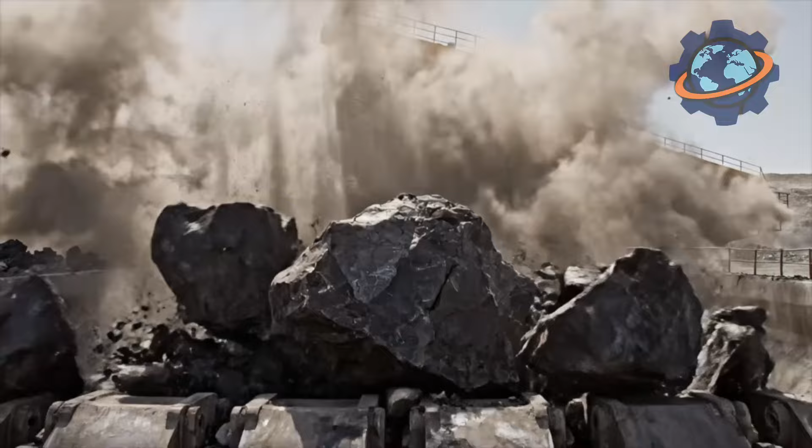Check your smartphone battery. It contains roughly 0.01 ounces of cobalt. Your laptop holds 10 times more. Electric vehicles require 30 pounds per battery pack.

This bluish-gray metal, rarer than platinum, enables rechargeable batteries powering modern civilization. Global demand exceeds 200,000 tons annually, growing 20% yearly. One nation controls 70% of supply: the Democratic Republic of Congo, where cobalt mining represents technological progress built on human suffering.

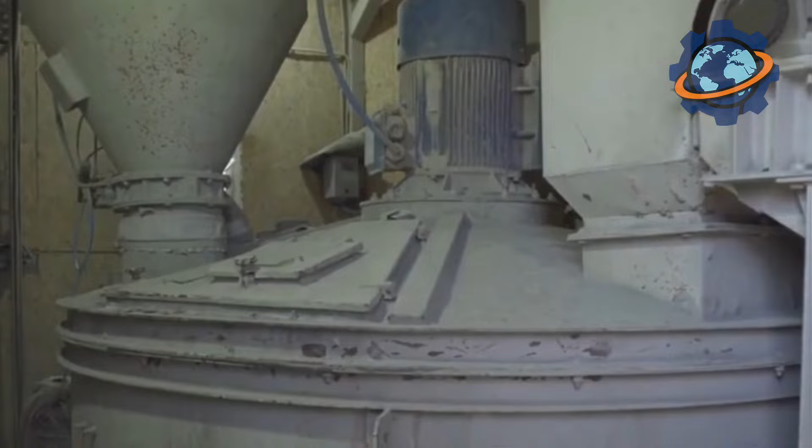How does an obscure metal buried in African soil become indispensable to iPhones and Teslas? Why can't battery manufacturers escape dependency on ethically compromised supply chains? Stay with us. You'll witness industrial-scale extraction reshaping Congo's landscape and discover cobalt's devastating secret.

The green energy revolution runs on metal mined by children.

Kolwezi district in Congo's Katanga province contains the world's richest cobalt deposits, ore bodies stretching 40 miles containing 8 million tons of recoverable cobalt. Glencore's Mutanda mine dominates the landscape: an open pit 2 miles across, descending 1,000 feet. Giant haul trucks, each carrying 400 tons, create spiral roads visible from space. This single operation produces 25,000 tons of cobalt annually, enough for 5 million electric vehicle batteries.

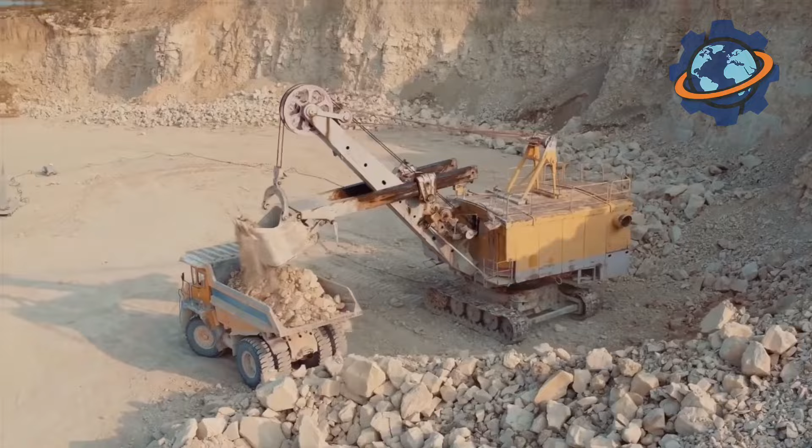But industrial mining tells only half the story. Surrounding the massive pit, tens of thousands of artisanal miners, creuseurs, dig by hand. They tunnel through unstable soil with shovels and pickaxes, extracting ore from shallow pits and abandoned mine shafts, with no safety equipment and no ventilation.

Children as young as 7 work alongside adults, earning $2 daily. The contrast is staggering: billion-dollar machinery operates next to subsistence miners dying for scraps. This is cobalt's duality, cutting-edge technology enabled by Stone Age extraction.

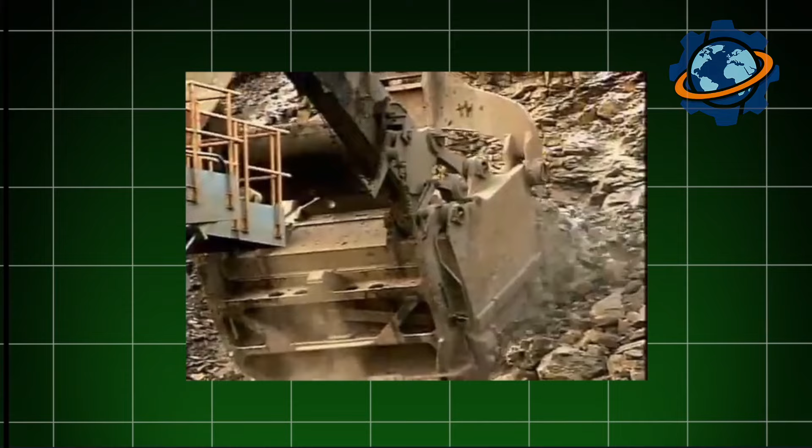The ore, heterogenite and carrollite, contains 3 to 8% cobalt, always mixed with copper. Massive crushers reduce ore to gravel. Ball mills grind further, creating powder fine as flour. The grinding buildings operate continuously, a deafening roar as steel balls pulverize rock. Each ton processed yields 60 pounds of cobalt and 300 pounds of copper. Cobalt is a byproduct, making economics complicated.

Flotation separation begins in enormous tanks containing chemical froth. Copper sulfides attach to bubbles, floating to the surface for collection. Cobalt remains in solution, requiring different chemistry.

The process generates massive waste. For every ton of cobalt extracted, 200 tons of tailings remain. These waste ponds, acidic and toxic, stretch for miles. The environmental damage is permanent: soil contaminated for centuries, groundwater poisoned indefinitely. But demand doesn't care about consequences. Battery manufacturers need cobalt, whatever the cost.

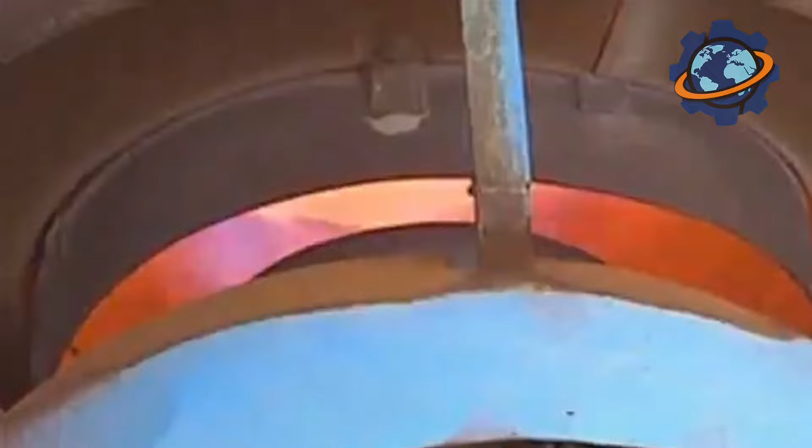Cobalt concentrate undergoes hydrometallurgical processing, chemical extraction replacing traditional smelting. The concentrate dissolves in sulfuric acid at 180 degrees. Copper precipitates first through pH adjustment, then cobalt gets separated from nickel and manganese through solvent extraction, organic chemicals selectively binding cobalt ions. The chemistry is precise, requiring exact pH, temperature, and reagent concentrations.

The result is cobalt sulfate solution, a pink liquid containing 20% cobalt. This solution ships to refineries, mostly in China, where final purification occurs.

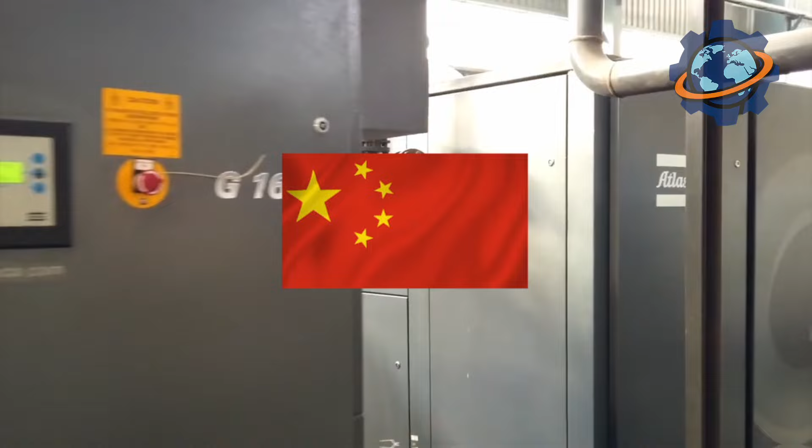Electrolysis deposits pure cobalt metal onto cathodes, sheets of cobalt growing atom by atom from solution. The metal emerges silver pink, hard and brittle. But most cobalt never becomes metal. It stays as cobalt sulfate or cobalt oxide powder, the forms battery manufacturers require. The entire supply chain funnels through Chinese refineries, controlling 80% of global processing capacity.

Battery-grade cobalt demands extreme purity, 99.8% minimum. Impurities like iron, nickel, calcium cause battery degradation. Quality control happens through mass spectrometry, analyzing samples to parts per billion accuracy. Rejected batches get reprocessed. Nothing wastes when material costs $60,000 per ton.

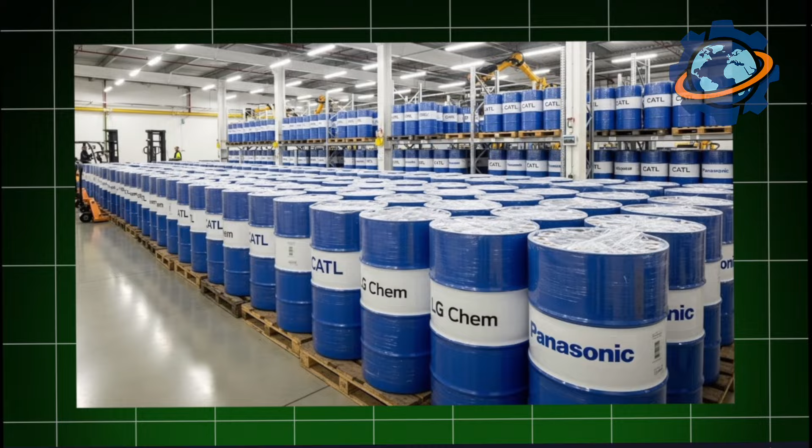The powder gets carefully packaged in sealed drums, each containing 500 pounds. These drums travel to battery manufacturers, LG Chem, CATL, Panasonic, the companies powering Tesla, Apple, Samsung. The cobalt combines with lithium and nickel in precisely calibrated ratios.

Lithium provides energy density, nickel adds capacity, and cobalt delivers stability, preventing thermal runaway, the catastrophic failure causing batteries to explode. Manufacturers desperately seek cobalt-free alternatives, but none work as well. The chemistry is frustratingly specific.

Inside battery factories, cobalt powder mixes with lithium and nickel oxides, creating cathode material. This mixture gets coated onto aluminum foil in layers thinner than human hair. The precision is absolute, coating must be uniform within 2% variation. Any inconsistency creates hotspots during charging, potentially causing fire.

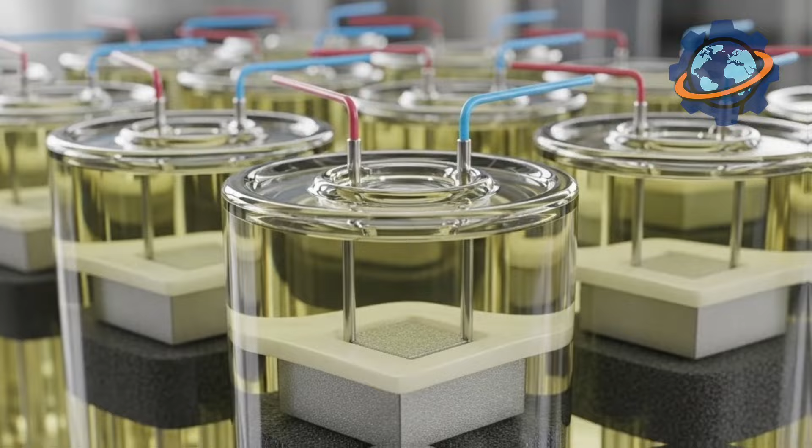The coated foil, along with graphite-coated copper anode and separator membrane, gets wound into cylindrical cells or stacked as prismatic cells. These cells fill with electrolyte, lithium salt dissolved in organic solvents, allowing lithium-ion movement between cathode and anode during charging and discharging. Each cell undergoes formation cycles, controlled charging that activates materials and identifies defects. Failed cells get disassembled, materials recycled. The waste is too valuable to discard.

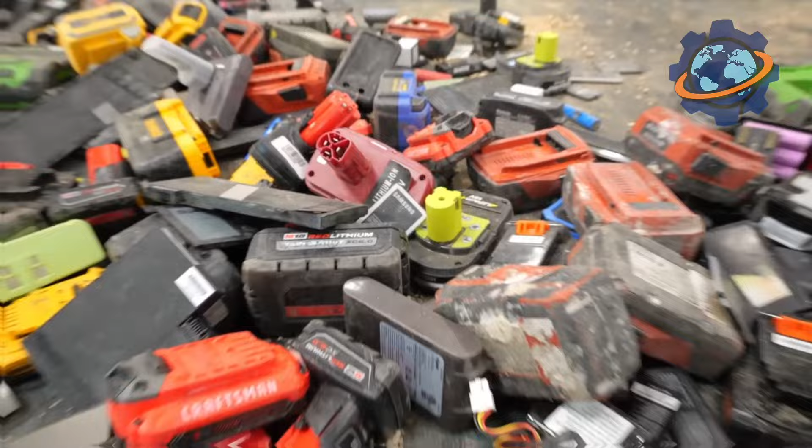Battery recycling could solve cobalt shortage, but currently only 5% gets recycled. The process is challenging. Batteries contain diverse chemistries mixed with plastics and electronics. Shredding risks fires from residual charge, but economic incentive grows. Recycled cobalt costs 40% less than mined material.

Hydrometallurgical recycling dissolves batteries in acid, separating metals through selective precipitation. The recovered cobalt, lithium, and nickel return to battery production with identical performance to virgin materials.

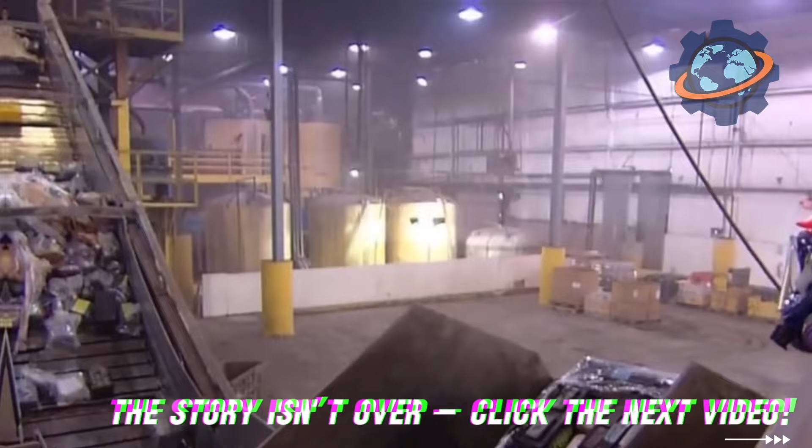The circular economy remains theoretical. Most batteries end up in landfills or incinerated, cobalt lost forever. Companies like Redwood Materials and Li-Cycle are building recycling infrastructure, but scale remains insufficient. By 2030, experts predict recycled cobalt could supply 30% of demand. Until then, Congo's mines run continuously, extraction accelerating despite consequences.

Cobalt derives its name from the German Kobold, meaning goblin, because medieval miners blamed goblins when cobalt ore poisoned them during silver extraction. For centuries, cobalt's only value was as blue pigment in pottery and glass.

Everything changed when John Goodenough invented the lithium-ion battery in 1980. His cobalt oxide cathode enabled rechargeable batteries light enough for portable electronics. Sony commercialized the technology in 1991, launching the mobile revolution.

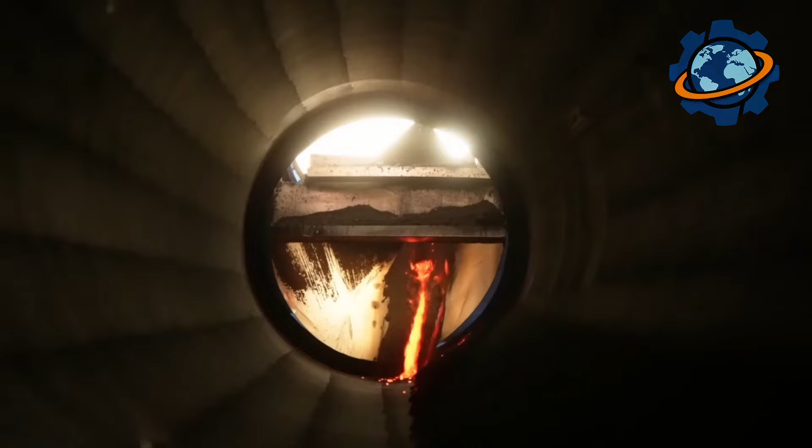Initially, cobalt demand remained modest. Cameras, laptops, and phones used small batteries. Then electric vehicles emerged. A single Tesla Model S contains 24 pounds of cobalt, equivalent to 1,000 smartphones. As EV adoption accelerates, cobalt consumption grows exponentially. By 2030, transportation will consume 60% of global cobalt supply.

The metal that poisoned medieval miners now powers humanity's energy transition. Irony lost on nobody. Carbon emissions perspective shows a paradox. Electric vehicles reduce emissions 80% versus gasoline cars over their life cycle, but mining cobalt generates massive environmental damage plus humanitarian crisis.

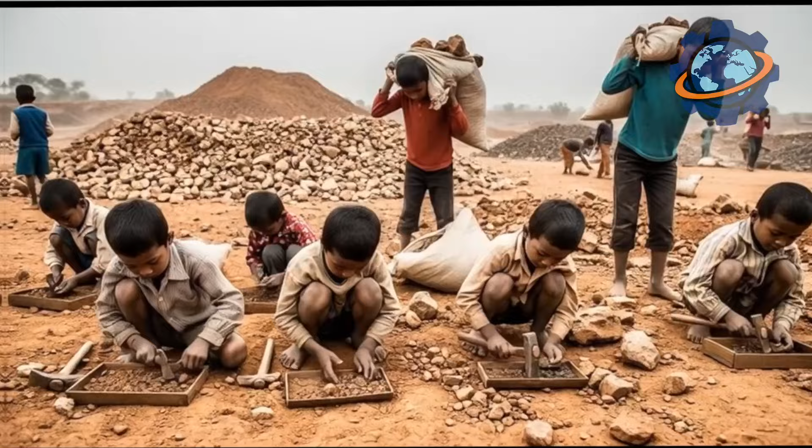Children in Congo work illegal mines, exposed to dust causing respiratory disease, digging tunnels that collapse regularly, earning subsistence wages while battery companies generate billions. Amnesty International documented children as young as 7 mining cobalt sold to major tech companies. The supply chain is deliberately opaque, ore changes hands multiple times before reaching refineries, obscuring its origins.

Here's the secret we promised: the green energy revolution cannot exist without ethically compromised cobalt. Every Tesla, every iPhone, and every laptop depends on metal extracted under conditions violating international labor laws. Battery manufacturers know this. They issue statements promising ethical sourcing while buying through intermediaries, providing plausible deniability.

The truth is uncomfortable. Transitioning away from fossil fuels requires accepting different moral compromises. We've replaced oil fields with cobalt mines, exchanging one exploitation for another. From Congo's pits to Silicon Valley's gadgets, the transformation completes. We've created technology liberating us from combustion engines while enslaving miners and supply chains we refuse to acknowledge.

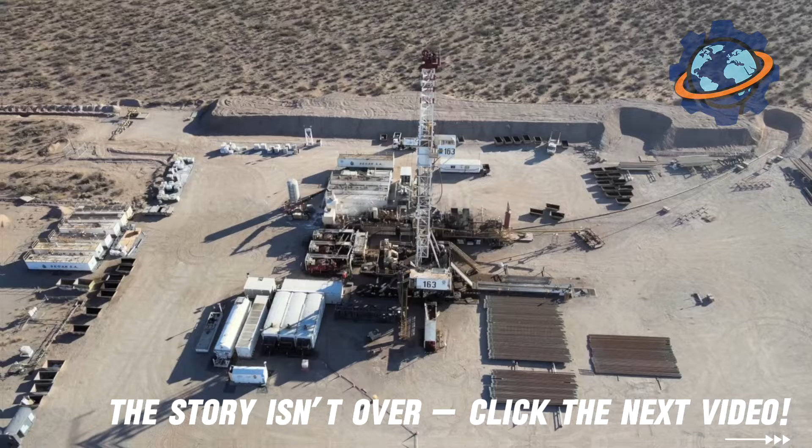That electric vehicle representing environmental consciousness contains metal mined by children. The battery in your pocket enabling instant global communication required someone else's suffering to exist. Progress always demands sacrifice. We've just decided others should make it. Cobalt doesn't just power devices, it exposes civilization's willingness to ignore atrocity for convenience. We know the cost. We pay it anyway.

Every year, billions of people around the world press the same pedal, and they don't even realize it was slowly killing them for decades. What was supposed to save lives quietly filled the air with poison. Why did a material once considered perfect vanish almost overnight? And what replaced it? There's one detail brake pad ads never mention, but it's what determines whether your car stops in that critical split second.

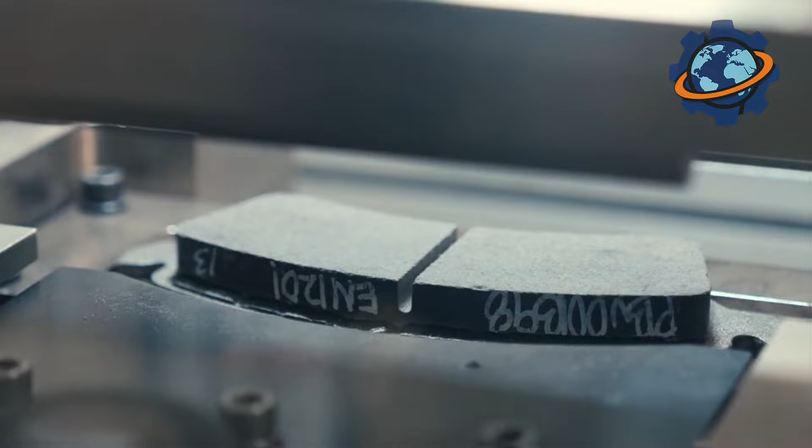Today, these pads withstand hell itself, don't smoke, and leave barely a trace. But the road here was deadly dangerous. Stick around till the end, and you'll discover which hidden component once cost millions of lives and why modern factories guard their formulas like state secrets.

In the 1920s, every brake pad contained asbestos, fibers that could handle 1500 degrees Fahrenheit and wouldn't wear out. But every tap of the pedal released microns of poison into the air, settling in the lungs of drivers and pedestrians. By the 1990s, asbestos had killed millions through lung cancer and mesothelioma. Europe banned it first in 1998.

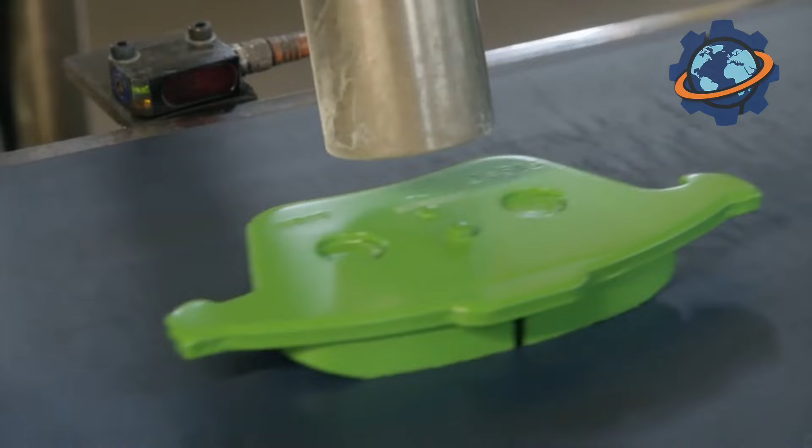Today, the top choice is ceramic composites. The base is ceramic made from silicon nitride and silicon carbide, mixed with copper fibers for heat dissipation. The material withstands 650 degrees without deforming, doesn't squeal, and doesn't dust. Ceramic makes up 40 or 50% of the mass, reinforced with steel fibers for strength.

At 500 degrees, regular pads smoke. Ceramic ones stay cool as ice. In this massive plant, something is born that'll save your life on the road.

Manufacturing ceramic brake pads isn't just mixing powder with binder. It's precise science involving pressure, fire, and high-precision machinery. Each pad, weighing 7 ounces, has to survive 600 degrees of hell, not crumble, and not let go of the rotor. Let's break down the process step by step, from raw materials to finished kit.

Everything starts with hoppers full of powders. The main ingredient, ceramic, meaning silicon nitride and silicon carbide, a white powder hard as diamond.

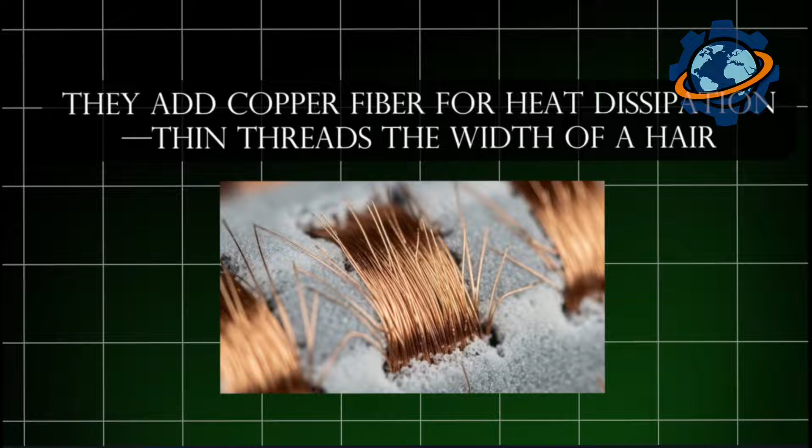They add copper fiber for heat dissipation, thin threads the width of a hair, graphite for smooth grip, reinforced glass for strength, barium sulfate for stability at high temperatures. Each recipe is a factory secret, like the Coca-Cola formula.

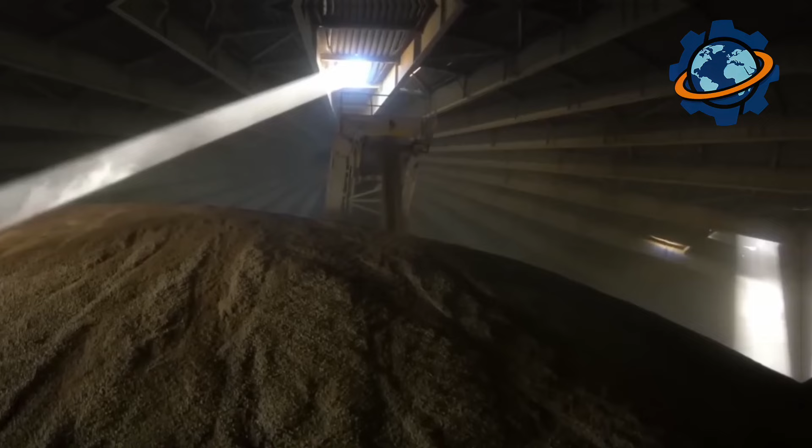In giant mixers with a 500-gallon capacity, powders are combined in precise proportions. They add liquid wax-based lubricant, 5 or 7% by weight. The mixer spins for 30 minutes at 50 revolutions per minute, transforming dry powder into a uniform wet mass, like bread dough. Temperature is held at 100 degrees so the lubricant doesn't freeze.

The result is raw dough weighing 1,100 pounds, ready for forming. The mass goes into a rotary press, a machine with 20 tons of force. They pour 550 grains of the mixture into a metal mold measuring 6 by 2.5 by half an inch. The top plate descends with 285,000 pounds per square foot of pressure, like parking a tank on your palm.

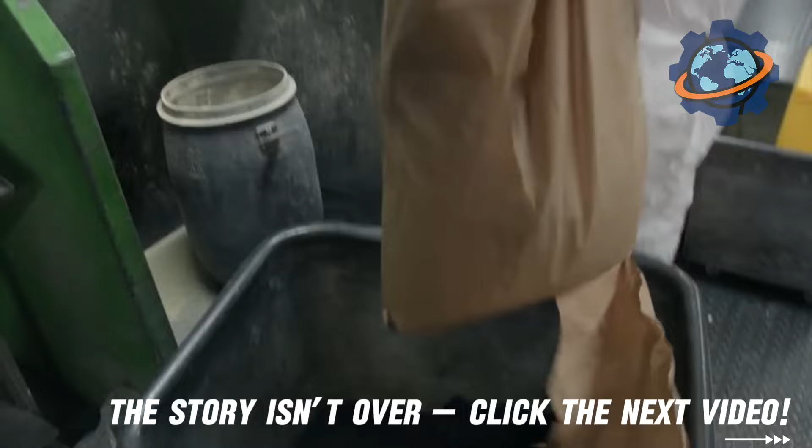In 10 seconds, the dough compresses into a monolithic green blank, 3/4 of an inch thick. The pressure squeezes out all the air, creating a density of 175 pounds per cubic foot. The press runs in cycles, 60 blanks per hour. Each comes out perfectly smooth with a friction surface angled at 5 degrees for better disc contact. The blank's still brittle as cheese, but it already has the shape of the future pad.

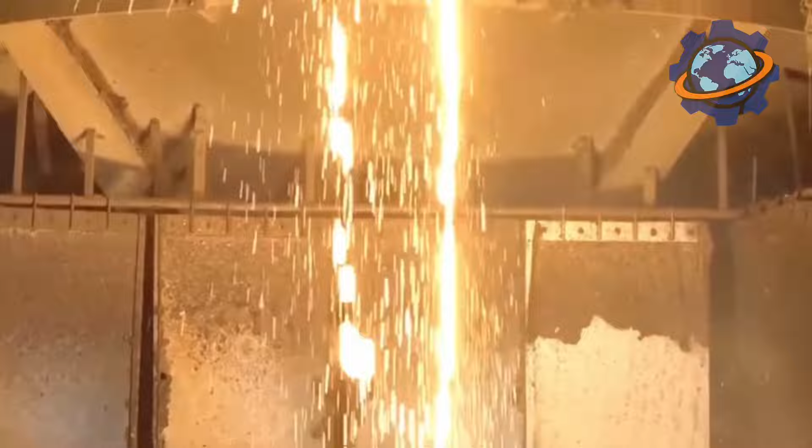The most critical stage? Sintering. Green blanks go onto steel trays, 50 pieces each, then get pushed into a tunnel kiln 100 feet long. Temperature rises gradually. At peak heating, 4 hours in, the ceramic melts. Copper fibers fuse. Graphite crystallizes. Total sintering time, 12 hours.

Finished pads, gray-silver monoliths, go to inspection. A laser scanner checks dimensions accurate to 1/100th of a millimeter. Ultrasound checks density and cracks. 2% get rejected. Next, grinding.

The machine removes 1/2 millimeter from the friction surface for perfect geometry. Edges get rounded to prevent squealing. They apply a protective coating, a thin layer of molybdenum disulfide for that first soft braking. Laser marked, then assembled into kits, 4 pads plus springs plus backing plate.

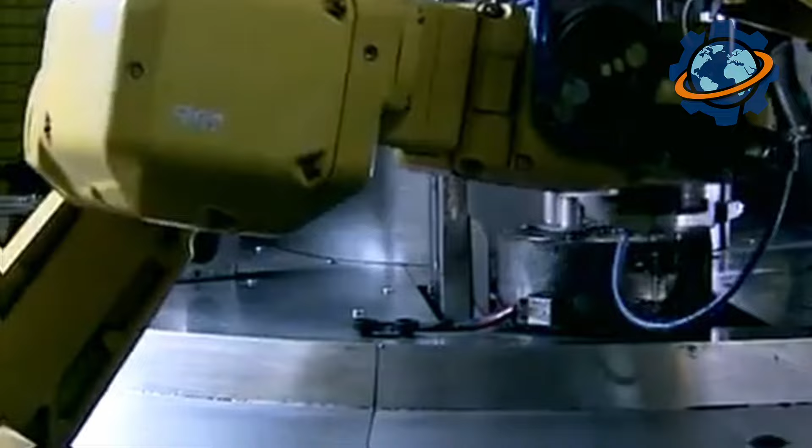The final test, the simulation stand. The pad is pressed against a disc spinning 2,000 revolutions per minute for 200 cycles. Acceleration, then hard braking up to 600 degrees. They check wear, squealing, dust.

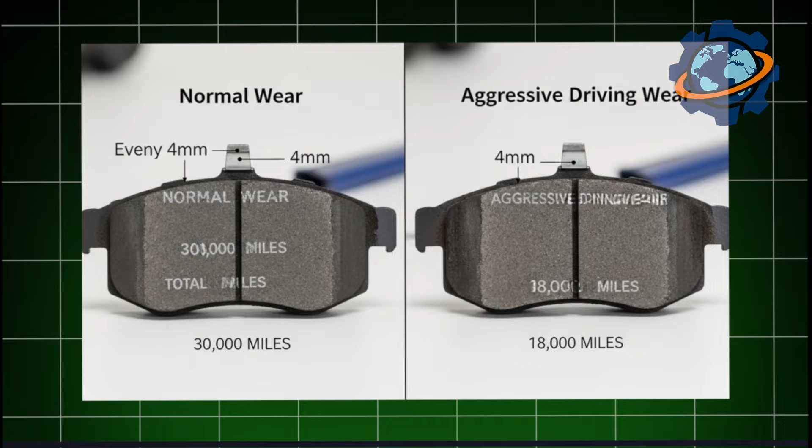Ceramic pads pass without smoke. Metal ones squeal. A finished pad wears out after 30,000 miles. That's normal wear. With aggressive driving, it wears out after 18,000 miles. The U.S. market operates with 131 facilities, which has decreased by 0.6% in recent years due to automation.

Production is tied to the automotive industry. Rising car sales drive demand, especially for pad replacements in trucks and passenger vehicles. Key trends: shifting to eco-friendly materials without copper.

California capped it at 0.5% starting in 2025, which cut pollution by 28% statewide. Imports matter, but tariffs affect local production. The leaders are the southern U.S., specifically Texas, Alabama, Tennessee, with Ford and GM plants.

The European brake pad market shows steady growth at an average annual rate of 4.7% through 2028. In Germany, the market leader, volume will hit nearly $320 million by 2028. France is growing at 5.5% annually, the UK at 3.8%. Metallic pads are still popular and hold 25% of the EU market because they're cheap for trucks and Porsches.

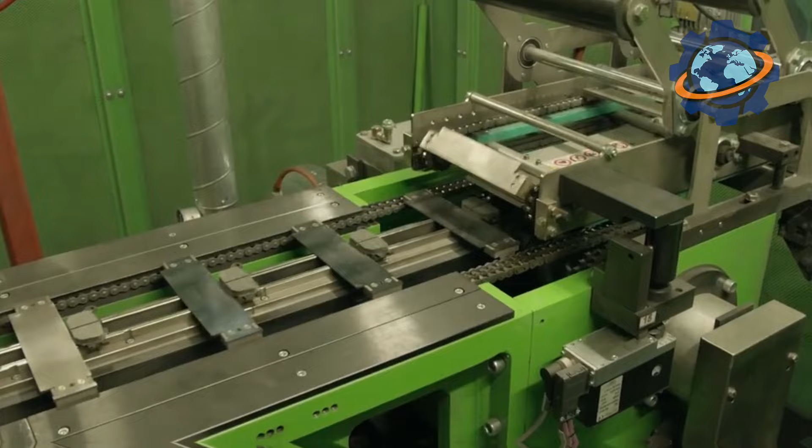But their dust is a problem. Steel and copper settle on roads, get into water and lungs. Ceramic cuts emissions by 80% compared to these semi-metallics.

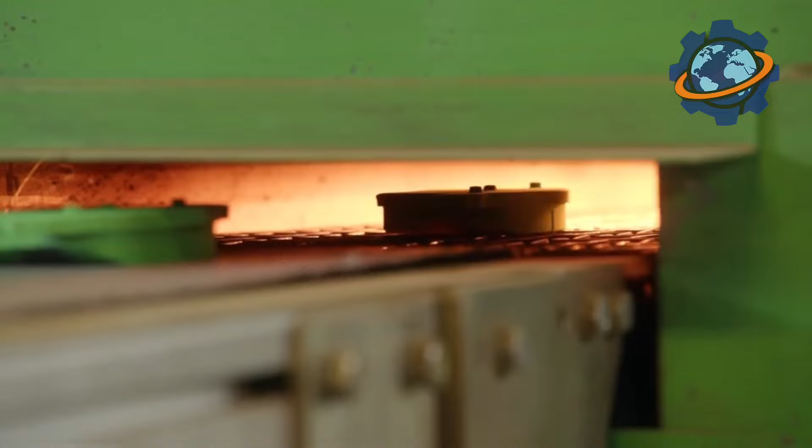Besides asbestos and metallic pads, there was an attempt to make organic ones. These are pads from the 2000s, the first mass replacement for asbestos. The base is synthetic rubber, fiberglass for reinforcement, Kevlar or aramid fibers for strength, plus barium sulfate and graphite.

The soft compound gave a quiet bite. Little dust, didn't scratch rotors. But at 550 degrees, they lose 30% of their stopping power, which works for daily driving but not for sport.

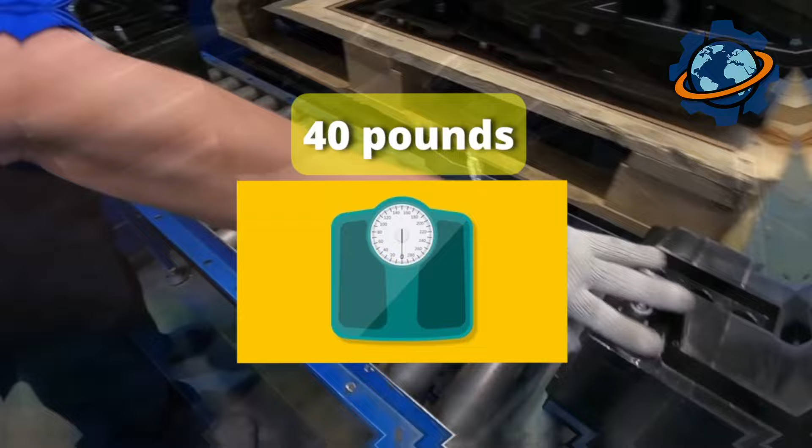Hold a car battery. It weighs 40 pounds. 30 of that is pure lead. Every year, humanity produces 11 million tons of this heavy, soft metal.

Romans used it for plumbing 2,000 years ago. We banned it from paint and gasoline because it poisons children's brains. Yet we can't quit it. Lead stops X-rays dead, stores electrical energy better than any alternative, and possesses one superpower no other metal can match.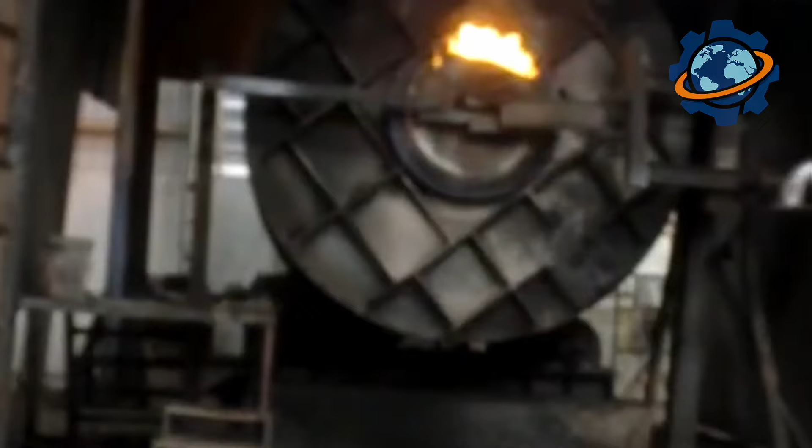How does rock containing lead sulfide become the shields protecting radiologists? Why do we mine fresh ore when mountains of old batteries exist? Stay with us. You'll discover why lead is simultaneously essential and deadly, and the shocking secret making it the most recycled material on Earth. 99% returns to use forever.

Our story begins in Missouri's Lead Belt, America's primary source. Unlike flashy gold mines, lead operations look industrial, almost boring. Massive drills bore 800 feet down, following veins of galena, lead sulfide ore appearing as metallic gray crystals.

Each ton of ore contains just 3% lead. The rest is worthless rock requiring removal. Underground, miners work in perpetual darkness, drilling blast holes into rock faces.

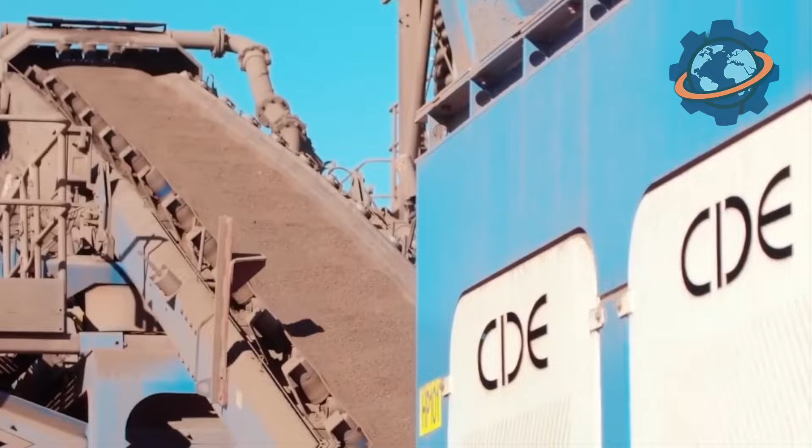The lead content makes galena unusually dense. Lift a basketball-sized chunk and it weighs like a bowling ball. You feel lead before you see it, explains one miner. Galena has this heft that surprises you every time.

Explosives fracture the ore. Loaders scoop rubble into trucks, climbing back to surface through spiral tunnels taking 20 minutes to traverse. Topside, the crushing begins. House-sized jaw crushers reduce boulders to gravel, while workers monitor from control rooms behind thick glass.

Lead dust is insidious, invisible particles that accumulate in bones, causing damage that appears years later. Modern facilities employ enclosed systems, but older operations tell different stories.

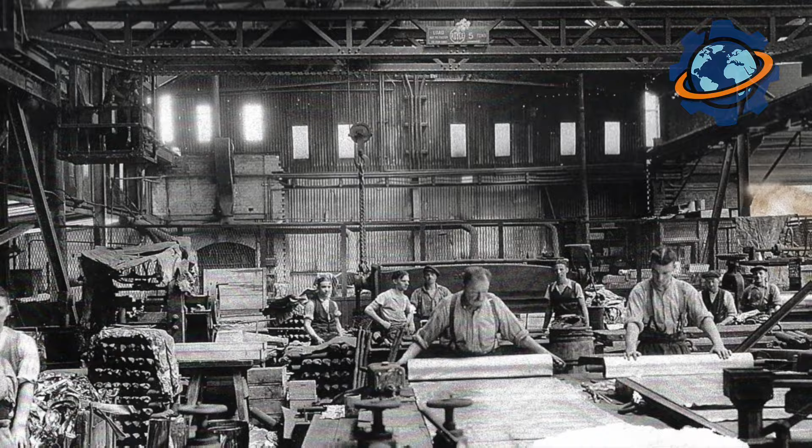Walk through a 1970s lead smelter photograph. Workers in street clothes, no respirators, covered in gray dust. Many develop neurological problems by age 50. The industry learned hard lessons about lead toxicity.

Today, air monitoring systems track particle counts continuously. Workers shower before leaving, and clothes stay on site. Blood tests happen monthly. One manager puts it bluntly: respect lead or it destroys you.

There's no middle ground. The ore enters roasting furnaces heated to 1,400 degrees. Here, sulfur burns away as sulfur dioxide, captured and sold to sulfuric acid manufacturers. What remains is lead oxide, a yellow powder looking harmless but deadly if inhaled.

The roasting building operates under negative pressure. Air flows inward, never outward, preventing escape of lead-contaminated atmosphere.

Watch the roasting process through observation windows. Yellow flames dance over tumbling ore. Operators adjust oxygen flow constantly. Too much air, lead oxidizes excessively. Too little, sulfur remains. Getting it wrong costs millions in lost efficiency.

The roasted material, called calcine, moves to smelting via enclosed conveyor belts. Nothing touches open air. The paranoia about containment isn't regulation theater, it's survival. Lead contamination cleanup can bankrupt companies.

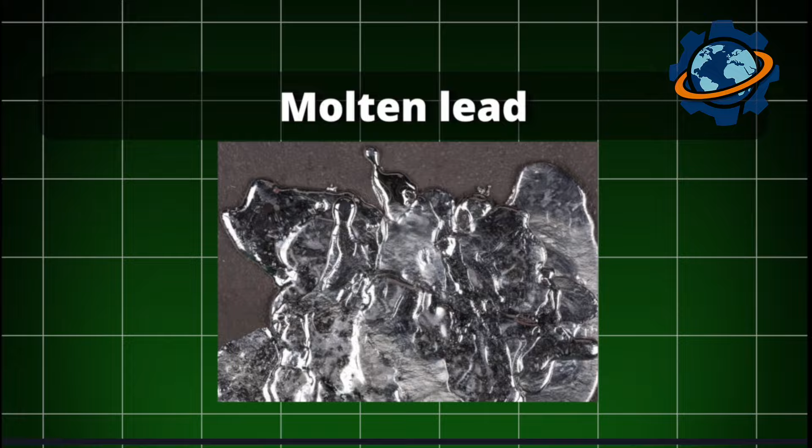Ancient Romans made lead pipes by pouring molten metal into sand molds. The same basic process works today because lead's properties haven't changed in millennia.

The final product achieves 99.99% purity. This refined lead feeds manufacturing plants producing batteries, radiation shielding, and specialized applications.

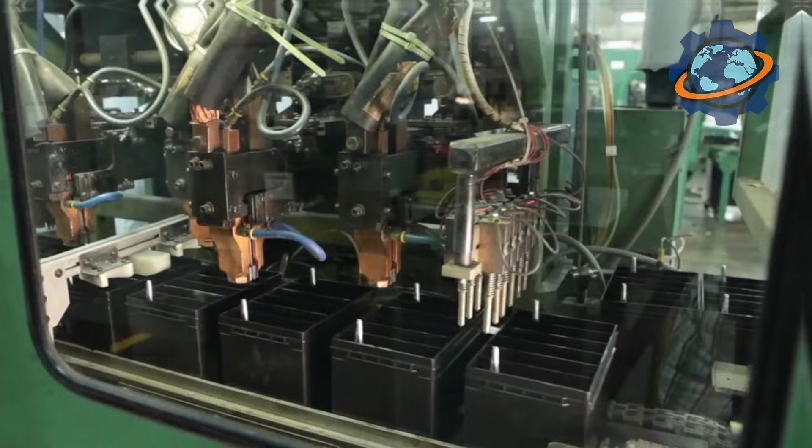But here's where the story shifts. Increasingly, smelters don't process mined ore, they process old batteries. Secondary smelters, as they're called, have grown to dominate the industry. Why mine lead when every dead car battery contains 20 pounds ready for reuse?

The economics are brutal. Recycled lead costs 40% less than mined lead. Primary smelters struggle competing. Many shut down, unable to match prices of operations running on discarded batteries.

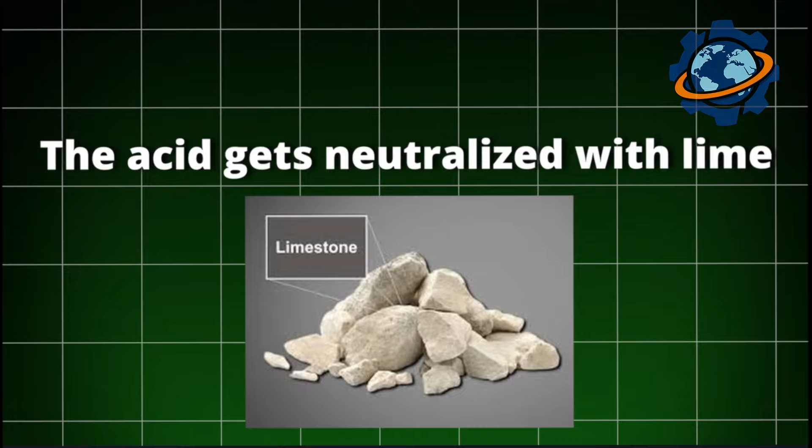Battery recycling begins at collection centers, where mechanics and scrappers deliver exhausted batteries by the thousands. Workers drain sulfuric acid into neutralization tanks. Each battery contains about 2 gallons of corrosive liquid that can't enter the recycling stream. The acid gets neutralized with lime, creating calcium sulfate, sold as a drywall ingredient.

Nothing wastes. Drained batteries move to breakers, rotating drums with internal hammers that shatter cases, separating lead plates from plastic housings. It's violent. The noise resembles continuous demolition.

Lead plates sink in water, plastic floats. Simple physics achieves separation. The plastic gets washed, shredded, and sold to manufacturers making new battery cases. The lead plates, still coated with lead oxide from battery chemistry, head to furnaces for smelting.

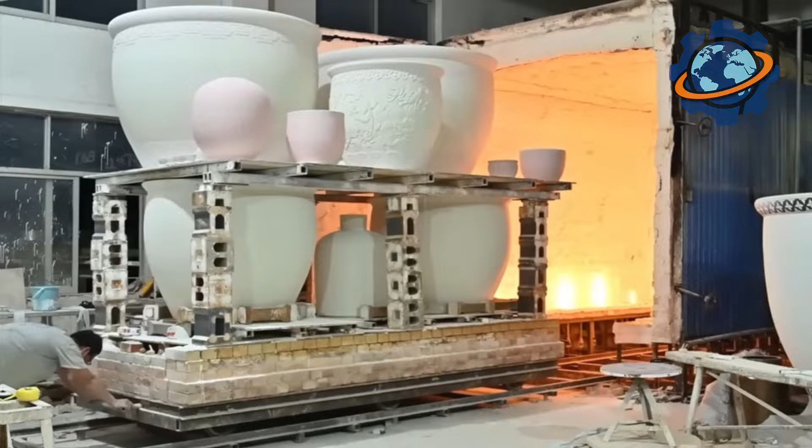One facility processes 50,000 batteries daily, enough lead to manufacture 12,000 new batteries. The smelting of recycled lead mirrors primary smelting, but operates at smaller scale with tighter controls.

Furnaces melt battery plates at 1,000 degrees. Impurities rise as slag, skimmed continuously. The molten lead flows into casting machines, producing standardized ingots shipped to battery manufacturers.

Here's the remarkable part. A battery recycled today will be back in a new battery within 30 days. The loop is that tight. And that battery will get recycled again in 3 years when it fails, and again and again.

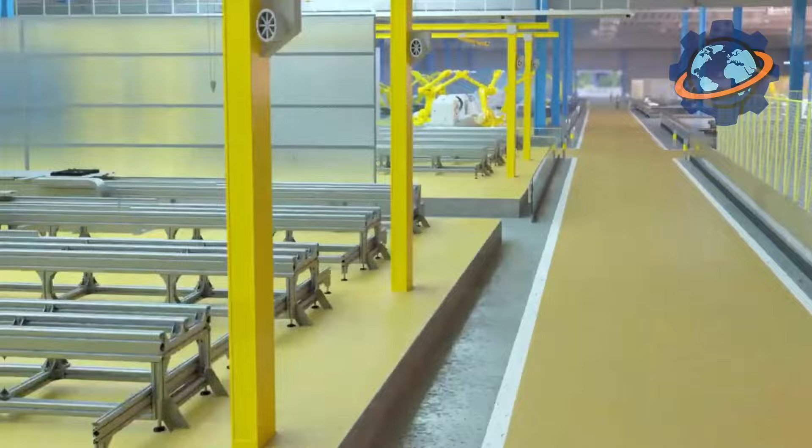Lead never wears out. Its atomic structure remains unchanged, regardless of how many times it melts and resolidifies. The lead in your current car battery might have started life in Roman plumbing, been refined into medieval type, reformed into ammunition, and now cycles through automotive batteries. Lead is functionally immortal. Lead's history intertwines with civilization's darkest chapters.

Romans sweetened wine with lead acetate, called sugar of lead, not knowing it caused madness in emperors. Medieval alchemists poisoned themselves studying it. The gasoline industry added tetraethyl lead as an anti-knock compound in 1921, despite knowing its neurotoxicity.

For 50 years, automobile exhaust sprayed lead over every city, poisoning children and causing measurable drops in IQ. The phase-out began in the 1970s as evidence became undeniable. Removing lead from gasoline represents public health's greatest victory. Childhood blood lead levels dropped 90%.

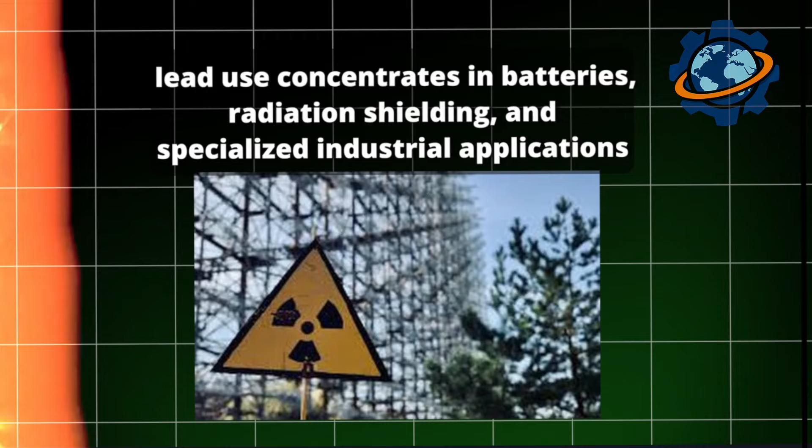Paint bans followed. Today, lead use concentrates in batteries, radiation shielding, and specialized industrial applications. We've learned to respect lead's toxicity while exploiting its unique properties. The metal that once poisoned Rome now powers modern transportation, but safely, contained, recycled endlessly.

Carbon emissions dropped 72% producing recycled lead versus mining virgin ore. Industry saves $63 billion annually through battery recycling. Processing scrap uses 65% less energy than conventional smelting.

Here's the secret we promised. Lead achieves 99% recycling rates, the highest of any industrial material.

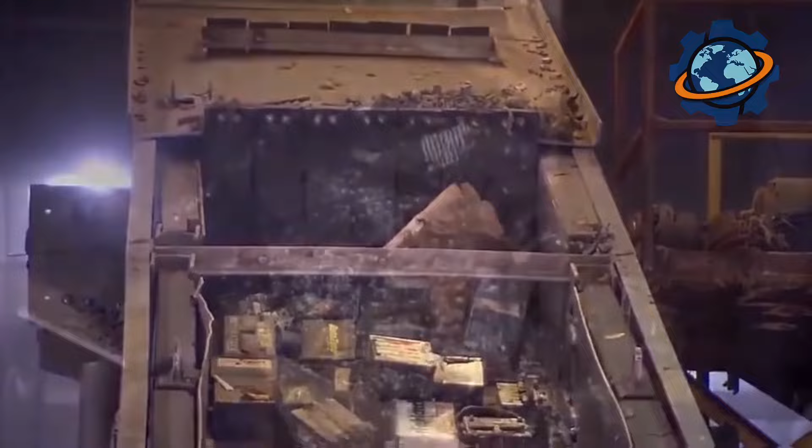That car battery has a 99% chance of being recycled properly because it's worth money. Scrappers pay you for dead batteries. Mechanics collect them religiously. The economic incentive creates a closed loop more efficient than any regulation could mandate.

From ancient Rome to modern recycling, the transformation completes. We've learned that some materials are too valuable to discard, too dangerous to mishandle, and too useful to abandon. Lead will never be green, but it might be the perfect example of circular economy functioning through market forces. That heavy metal under your hood has been serving humanity for millennia. It'll still be serving our descendants centuries from now, because lead never truly dies. It just waits to be reborn.

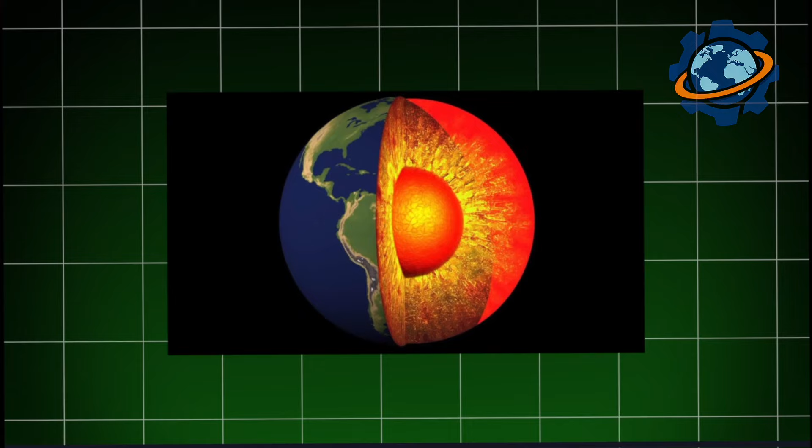Every second, humanity produces 60 tons of steel, 2 billion tons per year. That's more than all other metals combined. 95% of all metal used by civilization is iron and steel. Without iron, there'd be no skyscrapers, bridges, ships, cars, or trains.

The Lebedinsky Quarry in Russia is one of the planet's largest iron ore quarries. Depth, nearly 2,000 feet. Width, 3 miles. From the edge, you can't see the bottom. A gigantic wound in the earth from which 100,000 tons of iron ore are extracted daily.

Excavators as tall as 10-story buildings scoop rock with buckets holding 1,800 cubic feet. One bucket is like a small house. Dump trucks with 360-ton capacity haul ore up the spiral road. Wheels taller than a person.

But before loading the ore, it needs to be blasted. Drilling rigs create holes 65 feet deep. Tons of ammonium nitrate explosive are packed into these holes. The explosion? Earth trembles. A wall of rock tall as a skyscraper crashes down. A dust cloud rises 3,000 feet.

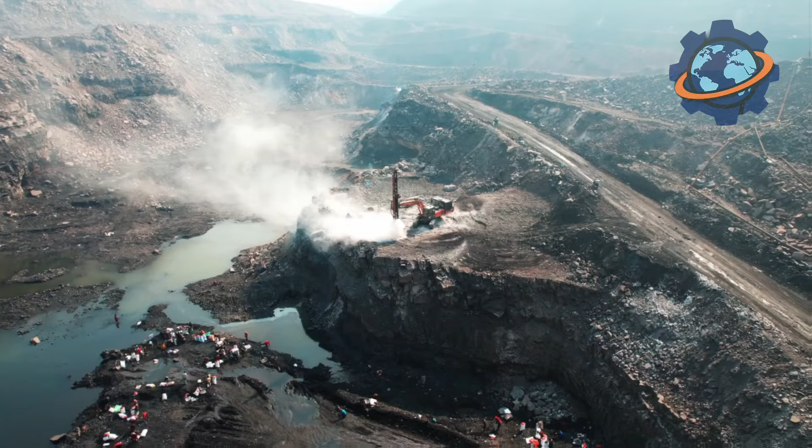After the dust settles, excavators begin work. The ore is reddish-brown, sometimes almost black. Magnetite and hematite, iron oxides. Iron content ranges from 30 to 60%. The rest is waste rock.

The ore goes to a processing plant. Massive cone crushers grind bus-sized chunks. The noise can be heard for miles. Ore gets crushed to fist size, then to gravel, then smaller.

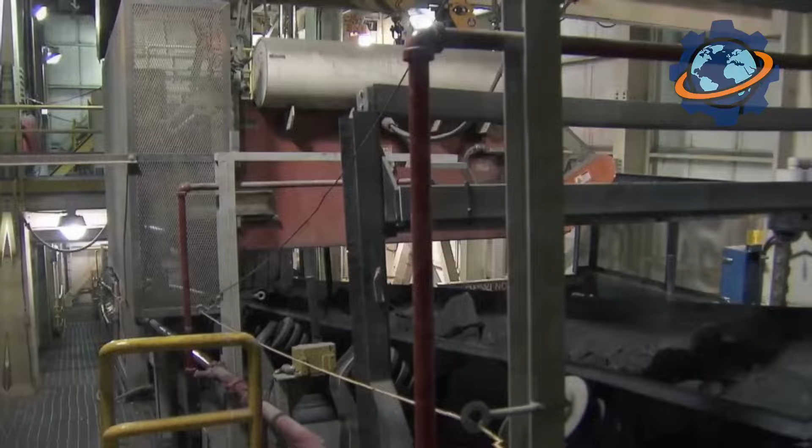It enters ball mills, steel drums 20 feet in diameter, 33 feet long. Inside are hundreds of tons of steel balls. The drum rotates, balls drop, grinding ore into fine powder. After 8 hours of grinding, you get reddish-brown dust. It's mixed with water, creating pulp, liquid slurry.

This slurry passes through magnetic separators. Magnetite sticks to magnetic drums. Waste rock washes away. The concentrate contains 65 to 70% iron. From this, they make pellets, granules the size of walnuts. Wet concentrate gets rolled into balls on special drums, then fired at 2,400 degrees Fahrenheit. Pellets harden, becoming rock solid.

These pellets are raw material for blast furnaces. Each plant produces millions of tons of pellets yearly. They're loaded onto trains and shipped to steel mills.

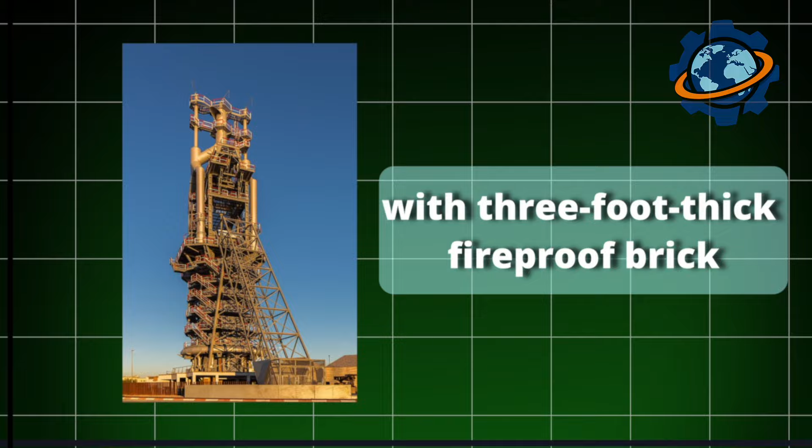A blast furnace is a steel tower 330 feet tall, 46 feet in diameter, 30 stories of pure metal and fire. Lined inside with 3-foot-thick fireproof brick. Internal volume, 176,000 cubic feet. Iron ore pellets, coke, and fluxes like limestone or dolomite are loaded from the top, in layers, like a layered cake. Several hundred tons at a time.

From below, through tuyères, openings in the walls, hot air is blown in. Air temperature, 2,200 degrees Fahrenheit. Pressure, 4 atmospheres. Coke ignites. Temperature in the furnace's lower section reaches 3,600 degrees Fahrenheit. Pellets slowly descend, heating up. Different reactions occur at different heights.

First, moisture leaves the ore. Then, at 930 degrees, iron oxide reduction begins. Carbon from coke strips away oxygen. At 1,800 degrees, ore becomes spongy iron. At 2,700 degrees, iron melts. Drops of molten metal flow down.

At the furnace bottom, molten pig iron accumulates, an iron alloy with 4% carbon. Pig iron temperature at the furnace bottom is 2,700 degrees Fahrenheit. It glows blindingly white with an orange tint.

Pig iron is denser than slag, so it stays at the bottom. Slag, molten impurities and fluxes, floats on top. Every 4 hours, they open the tap hole, an opening in the furnace's sidewall.

Pig iron tapping is a fire show. A stream of molten metal flows down channels. Sparks fly dozens of feet. The brightness requires dark glasses to watch.

Pig iron flows into massive ladles on railroad cars. One ladle holds 300 tons. It's a locomotive made of molten metal. The ladle gets covered to prevent cooling and shipped to the steelmaking shop.

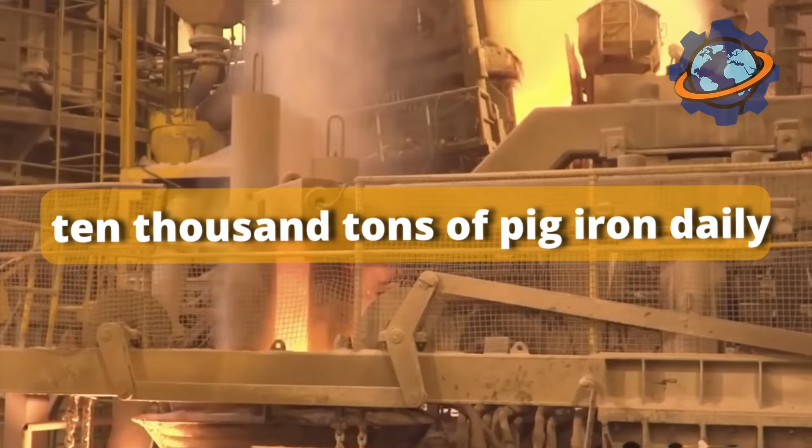One blast furnace operates continuously for years. Stopping is catastrophic - metal would solidify inside. The furnace produces 10,000 tons of pig iron daily, that's like 100 railroad cars. Major steel mills have 10 to 15 blast furnaces.

But pig iron isn't steel yet. It's brittle due to high carbon content. Steel is needed, an alloy with less than 2% carbon.

Pig iron gets poured into a converter, a massive pear-shaped vessel 33 feet tall, lined with fireproof brick. It holds 350 tons of molten metal. The converter tilts, pig iron pours in, steel scrap is added for cooling.

The converter returns to vertical position. An oxygen lance, a tube 20 inches in diameter, lowers from above. Oxygen flow begins - a jet of pure oxygen at 150 pounds per square inch pressure strikes the molten metal.

A violent reaction begins. Oxygen oxidizes carbon, silicon, manganese, the impurities in pig iron. These exothermic reactions release enormous heat. Temperature rockets to 3,200 degrees Fahrenheit.

Metal boils and churns. Flame tongues several feet high shoot from the converter mouth. Sparks and molten drops fly everywhere. The blowing process takes 20 minutes.

In this time, 350 tons of pig iron become steel. Carbon burns down to 1% or less. The converter tilts, steel pours into a ladle. The molten metal glows blindingly white at 2,900 degrees Fahrenheit.

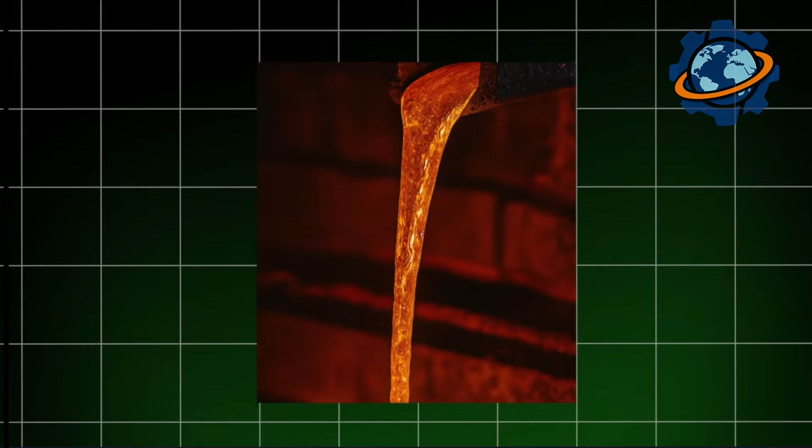Then steel gets cast. There are two methods. First, continuous casting - molten metal pours into a crystallizer, a water-cooled copper mold. Below, a solidifying blank emerges, a slab 8 inches thick, 6.5 feet wide.

It glows red, surface temperature around 1,800 degrees Fahrenheit. Gas cutters slice the slab into 33-foot lengths. One slab weighs 25 tons.

Second method, casting into ingot molds. Steel forms, creating ingots up to 50 tons. These ingots and slabs are semi-finished products.

They go to rolling mills. There begins the final transformation, turning thick blanks into thin sheets, rails, or beams. Slabs heat in reheating furnaces to 2,200 degrees Fahrenheit, red hot.

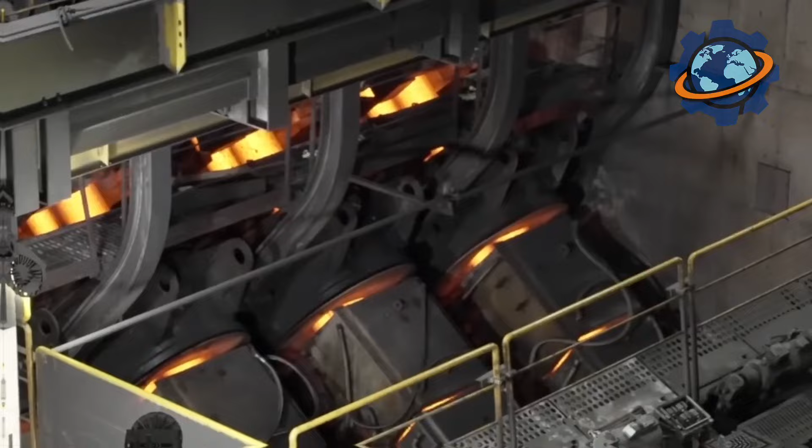Then they go to the rolling mill. It's a line of dozens of rolls, steel cylinders 3 feet in diameter weighing dozens of tons. Rolls rotate toward each other.

The red-hot slab enters between rolls. They squeeze and roll it. The slab gets thinner and longer. It passes through the next pair of rolls, even thinner, dozens of times.

An 8-inch thick slab becomes a sheet 1 to 2 millimeters thick. Length grows from 33 feet to over half a mile. Rolling speed on finishing mills reaches 50 miles per hour.

Red-hot steel ribbon flies through the mill, sparks flying everywhere. Temperature drops to 1,400 degrees Fahrenheit, metal darkens. The strip cools with water, winds into giant coils weighing 20 to 30 tons. This is hot-rolled steel, the foundation for car bodies, appliance housings, building structures.

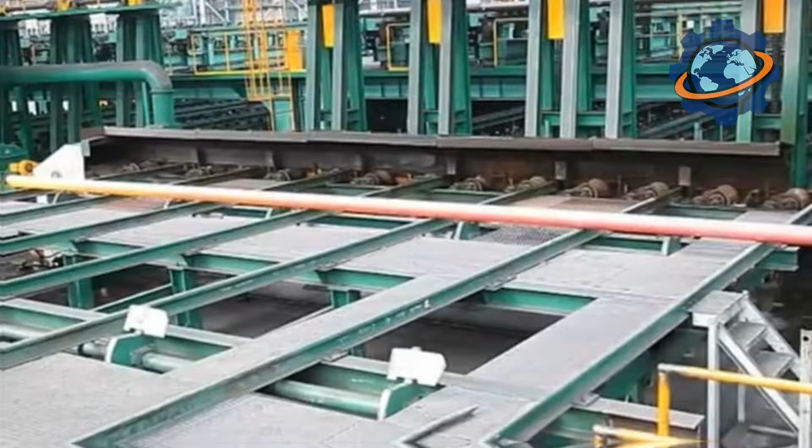Global steel production is 2 billion tons yearly. China produces over 1 billion tons, half the world's output. India, Japan, the US, Russia are other major producers. Steel is infrastructure's backbone.

95% of metal structures are steel, from skyscrapers to tin cans, from tankers to paper clips. Iron and steel are civilization's skeleton.

Iron is the oldest metal after copper and bronze. The Iron Age began 3,000 years ago. First, iron came from meteorites, ready-made metal fallen from the sky. Egyptian pharaoh Tutankhamun was buried with a meteorite iron dagger.

Smelting iron from ore was learned by the Hittites in Asia Minor around 1200 BC. They kept the secret for centuries, but the technology spread. Iron weapons were stronger than bronze.

Iron plows worked soil better than wooden ones. Civilizations with iron defeated civilizations without iron. In medieval times, iron was made in small furnaces.

The Industrial Revolution began with the blast furnace invention in the 18th century. Early furnaces used charcoal; later, they switched to coke from coal. The 19th century brought the converter process, enabling rapid pig iron to steel conversion.

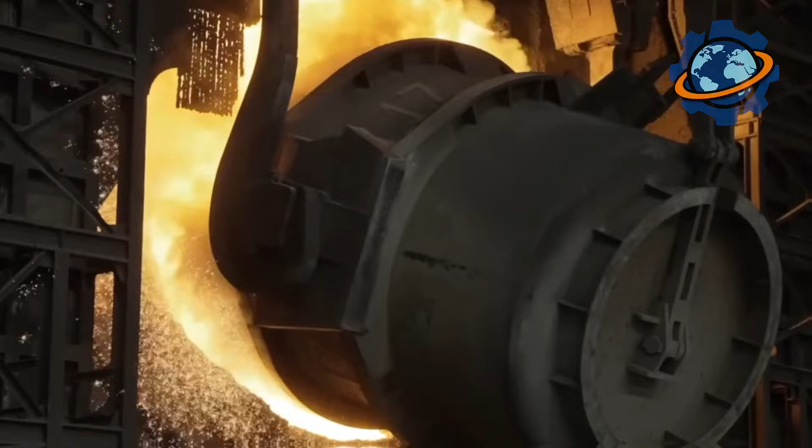Bessemer, Martin, Thomas - names that changed the world. The 20th century was the steel century. Skyscrapers, bridges, ships, automobiles - without steel, there'd be no modern world.

Traveling from explosions in 2,000-foot-deep quarries through giant crushers and magnetic separators, through 300-foot-tall blast furnaces at 3,600 degrees and converters where oxygen burns out carbon in 20 minutes, through rolling mills where 8-inch slabs become millimeter-thin sheets.

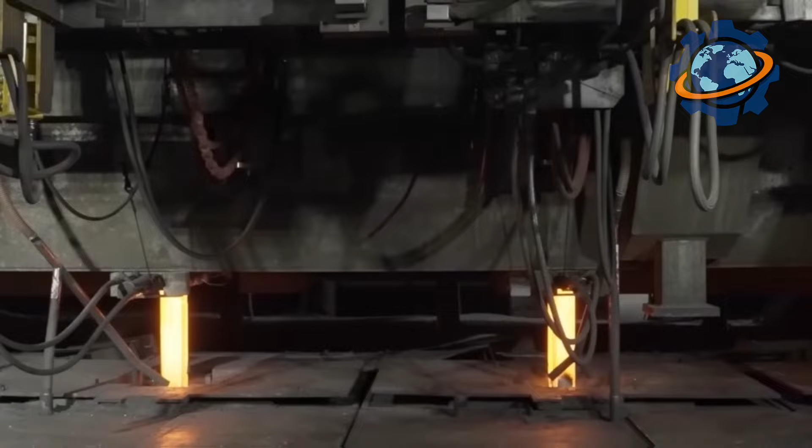Steel emerges, the metal that built civilization. 2 billion tons per year, 60 tons every second. The metal everything around us is made from. Every skyscraper, every bridge, every car, every ship.

It's iron, mined from red ore, remelted in fire, rolled into sheets. More than half of Earth's weight is iron. The planet's core is molten metal. And on the surface, iron rules.

95% of all metal is iron and steel. From nails to bridges, from paper clips to skyscrapers, iron holds the world together. Without iron, humanity would collapse back to the Stone Age. No machines, no electricity, no internet.

Everything's built on iron. From fiery rivers of molten pig iron in blast furnaces to steel beams holding up skyscrapers, iron is the foundation, the base, civilization's skeleton. Metal of the gods that became metal of the masses. The most abundant, most important, most irreplaceable.

Iron, the metal that holds the planet together. Every year, humanity extracts over 2 billion tons of iron ore from Earth's crust. Picture this: more than half of our planet's entire weight is iron, most locked in the core, creating the magnetic field protecting all life. But here's what shocks engineers worldwide: we're standing on the most abundant metal in the universe, yet accessing it requires temperatures hotter than volcanic lava.

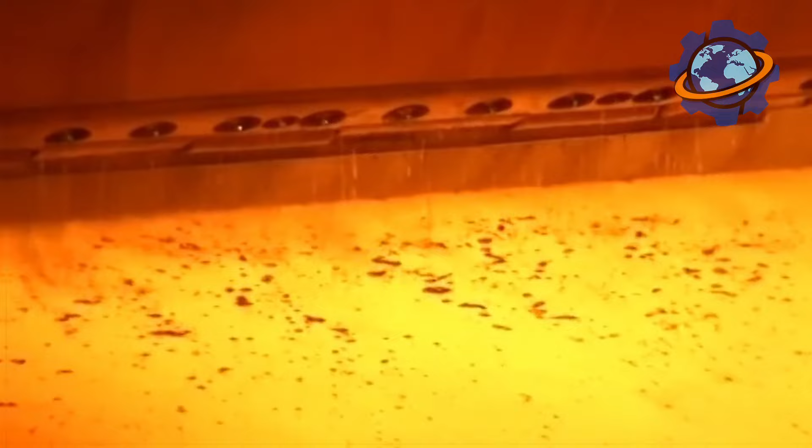How does rust-colored rock transform into gleaming steel skyscrapers? How do ancient mountains become modern civilization? Stick around till the end. You'll discover why iron shaped human history more than gold ever did, and the jaw-dropping secret hiding inside every bridge, car, and building around you right now.

The story begins in Western Australia's Pilbara region, where iron mountains stretch across landscapes older than dinosaurs. Massive excavators, standing 8 stories tall, picture buildings that walk, tear into rust-red cliffs with bucket teeth weighing 12 tons each. These mechanical giants rip through rock layers formed 3 billion years ago when Earth's oceans first rusted.

With thunderous crashes echoing across 40-mile-wide craters, each excavator loads haul trucks carrying 400 tons per trip. That's the weight of 80 elephants moving at 40 miles per hour on tires taller than basketball hoops. Processing 30 million tons annually from single mines, enough iron ore to build 12 Golden Gate bridges every single day.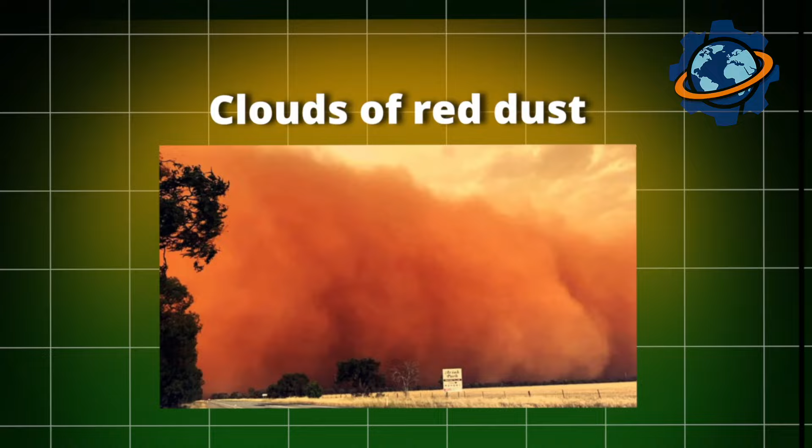Next comes crushing, where house-sized jaw crushers, imagine dinosaur mouths made of hardened steel, pulverize boulders into gravel-sized chunks. With deafening roars splitting eardrums even through protection, these crushers generate forces exceeding 20,000 pounds per square inch. Clouds of red dust billowing upward create artificial sunsets visible from space satellites.

Conveyor belts stretching 12 miles long, longer than Manhattan, transport crushed ore at 18 miles per hour. Workers riding inspection carts traverse distances requiring 25 minutes one way. That's enough belt to wrap around 300 football fields. Every hour, 50,000 tons flow through this system, weight equivalent to 5 Eiffel Towers moving continuously past checkpoints.

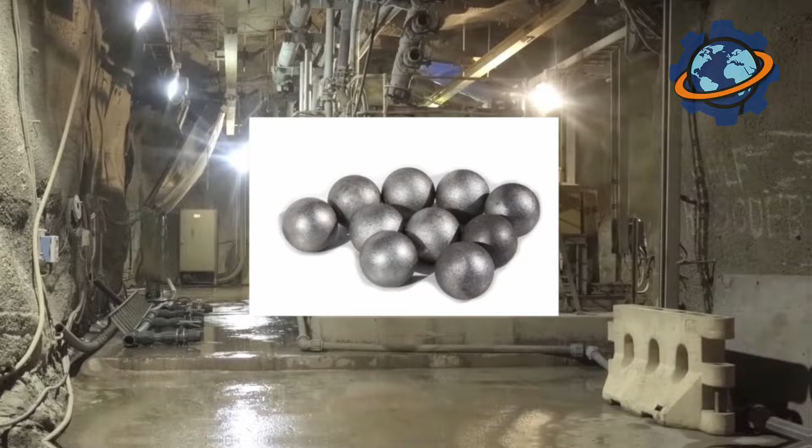Giant grinding mills, standing 5 stories tall, with diameters matching Olympic swimming pool widths, pulverize rock into fine powder. Inside these rotating drums, 20-ton steel balls, each weighing more than shipping containers, tumble with ore, creating grinding thunder heard miles away. Operators monitor vibrations. Wrong frequencies mean catastrophic bearing failures, costing millions.

At rotation speeds creating gravitational forces triple normal Earth gravity, particles shrink to powder finer than talcum. Processing 8,000 tons hourly, that's filling semi-truck after semi-truck every 30 seconds. This powder, called concentrate, contains 65% iron. Magnetic separators then extract iron particles using forces strong enough to levitate railroad spikes, leaving waste rock behind.

Next comes the blast furnace, a towering inferno standing 30 stories high, its steel shell glowing dull orange even from outside. At internal temperatures exceeding 3,000 degrees Fahrenheit, hot enough to vaporize aluminum instantly, iron ore transforms into liquid metal. Picture Dante's Inferno engineered with precision.

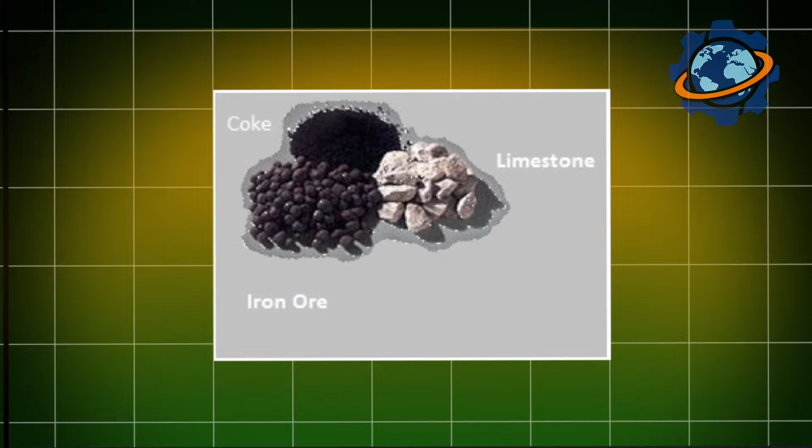Measured charges of iron ore, coke, and limestone descend from the top, while superheated air blasts upward at 2,000 degrees from ring-shaped nozzles called tuyeres. This creates a raging chemical storm, where carbon monoxide rips oxygen from iron oxide molecules. The reaction releases enough heat to melt granite. Every 3 minutes, sensors check 20 different parameters. Without precision, furnaces explode with force demolishing city blocks.

The blast furnace operates continuously for 15 years, never cooling, never stopping, like Earth's core relocated to industrial facilities. Inside this chemical reactor, materials descend through distinct zones. Upper regions preheat incoming ore. Middle zones drive off moisture and carbon dioxide. Lower depths become hell itself, where iron liquefies.

At the hearth bottom, molten iron collects at 2,800 degrees Fahrenheit, dense as lead but flowing like water. Every 4 hours, workers drill through clay-plugged tap holes. Liquid iron erupts in blinding white rivers, flowing through ceramic channels into railroad cars holding 300 tons each.

This step is critical because timing determines metal purity. Tap too early, slag contaminates. Too late, furnace pressure ruptures containment walls.

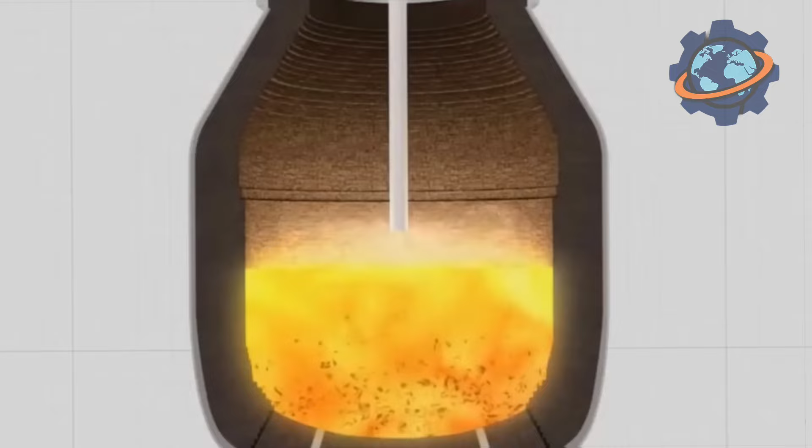After tapping, slag, lighter impurities floating atop molten iron, gets diverted into separate channels. This glowing amber liquid, essentially liquefied rock, contains calcium, silicon, and aluminum oxides stripped from ore.

Rather than waste, it becomes roadbed material and cement ingredient, recycled at 98% rates globally. The molten iron, called pig iron, contains 4% carbon, too brittle for construction.

Picture glass that looks metallic. Drop pig iron from waist height, it shatters into fragments. Next comes the basic oxygen furnace, where pure oxygen blasted at supersonic speeds through 3-foot diameter lances burns away excess carbon in 17 minutes. Flames shooting 70 feet high, temperatures hitting 3,200 degrees, create hurricane-force winds inside steel vessels holding 350 tons of liquid metal.

Steelmaking requires precision rivaling brain surgery. Computer-controlled oxygen flow adjusts by milliseconds. Operators add exact amounts of manganese, silicon, chromium, elements that change steel properties dramatically. Too much carbon, steel cracks in winter cold. Too little, metal bends under load.

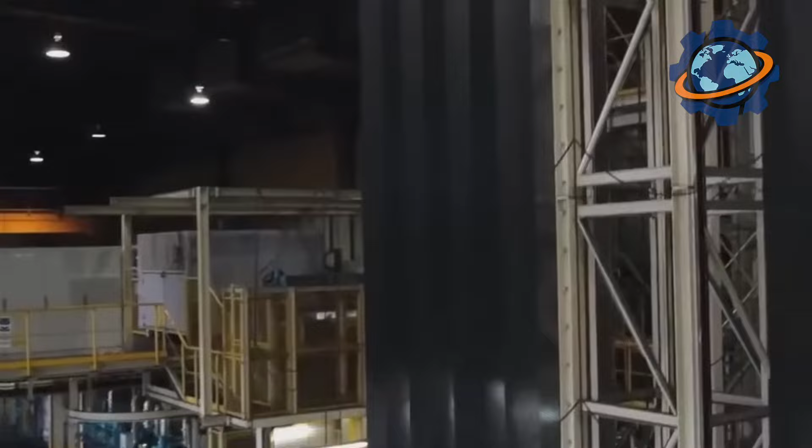Picture this: alloying elements get injected via submerged lances. Electromagnetic stirring, invisible but powerful, homogenizes composition. Samples extracted every 3 minutes get analyzed via spectrometers, determining chemistry within seconds. Modern furnaces achieve carbon content accuracy to 0.01%, the difference between a skyscraper standing or collapsing.

After refining, liquid steel flows into continuous casting machines producing slabs 30 feet long, weighing 25 tons, at a rate of 1 slab every 90 seconds. This wasn't always so advanced.

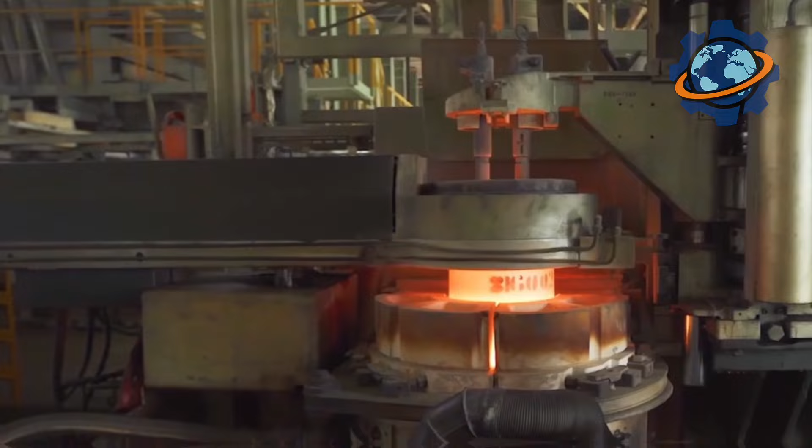Back in ancient Anatolia around 1300 BC, Hittite metallurgists discovered heating iron ore with charcoal produced workable metal. That breakthrough, accidental furnace conditions reaching iron's melting point, changed human civilization forever. Iron tools outperformed bronze, enabling an agriculture revolution.

The breakthrough came when British inventor Henry Bessemer patented his converter in 1856, slashing steel production time from 24 hours to 17 minutes. Suddenly, steel costs dropped 90%. This single invention built modern cities. Skyscrapers, bridges, railroads exploded across continents.

Today, global steel production exceeds 1.9 billion tons annually. That's enough to build 75,000 Eiffel Towers yearly, or manufacture 43 million automobiles, or construct bridges connecting every coastline on Earth.

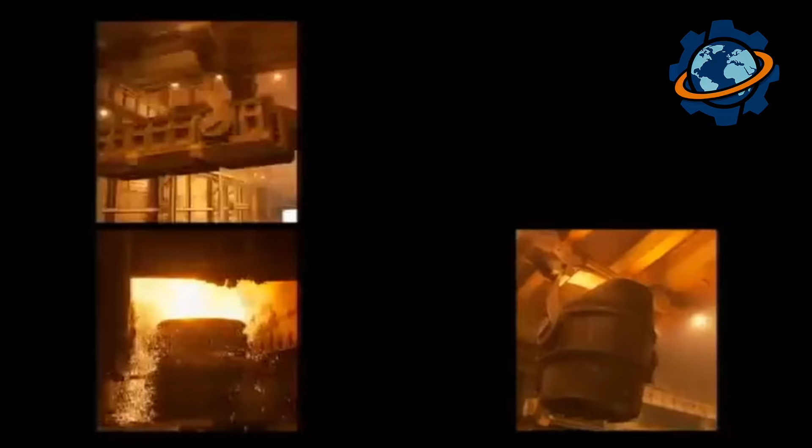Carbon emissions drop by 62% when using recycled steel versus virgin ore, equivalent to removing 12 million cars annually. Industry saves over $80 billion yearly through scrap recycling. Processing costs drop 43% because melting scrap requires a third the energy of blast furnaces.

So here's the secret promised: every ton of steel you see, bridges, buildings, cars, will be recycled indefinitely. Unlike plastic decomposing into microparticles or paper pulping into mush, steel never degrades.

Magnetic separation extracts it perfectly from demolished structures. That girder in your office building might contain steel from 1930s locomotives. Your car's frame could include battleship armor from World War II. Nothing disappears. Metal merely transforms, reborn eternally.

From ancient mountains to modern marvels, the cycle completes. Iron, humanity's most essential metal, circulates through civilization like blood through veins. We're not consuming Earth's iron, we're borrowing it briefly, before passing it forward to futures we'll never see.

Every year, the world melts over 1 billion tons of pig iron. But where does all that fiery metal come from? Imagine a giant furnace as tall as a 35-story skyscraper that never sleeps. Its guts glow like the Earth's core, and the temperature hits 3,600 degrees Fahrenheit, that's 2,000 Celsius. This is a blast furnace.

They don't just melt metal here, they give birth to the heart of industry. But there's a secret that only the guys standing at the tap hole know. If you stick around to the end, you'll find out what's really happening in the center of this burning fortress, and why it changes everything.

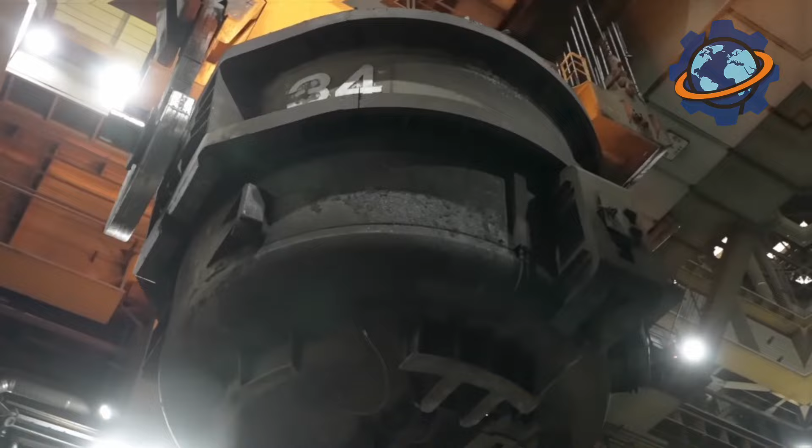Imagine a colossal tower, taller than a 35-story skyscraper. The ground beneath your feet vibrates slightly from its relentless work, and the air is filled with a hum, like the breathing of a giant beast. At night, its top glows, pushing back the darkness. This is a blast furnace, a massive vertical smelter, where 24 hours a day, 7 days a week, the magic of turning ore into metal happens non-stop.

Why blast furnace? The name comes from the process itself, and it's no accident. The whole secret to a blast furnace is the constant blast of incredibly hot air that fuels the fire and kicks off all the necessary reactions.

If you were to slice a blast furnace open, you'd see it looks like a stretched out bottle. Every part of it has a name and a purpose. The walls of the furnace are lined with special refractory bricks, capable of withstanding temperatures that would melt solid rock. This is a true fortress, built to tame fire itself.

So what do they feed into this fiery throat? The process is like cooking from a very strict recipe. The mix of ingredients loaded into the furnace is called the charge. Here are its main components: iron ore, fuel coke, and fluxes. These three ingredients are loaded into the furnace in precisely measured layers.

A layer of coke, then a layer of ore with fluxes, then coke again, and so on. Every few minutes, a new batch weighing tens of tons is sent into the furnace. The iron ore is the foundation of it all.

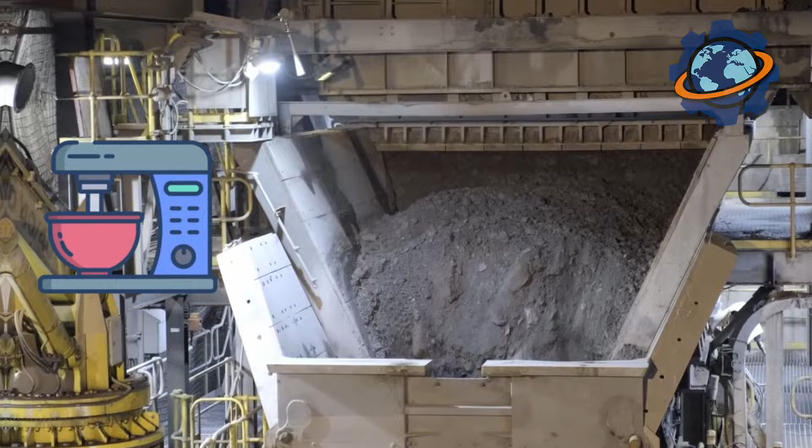They usually don't just use raw ore dug from the ground, but specially prepared sinter or pellets. These are baked clumps of fine ore, or rolled balls of ore concentrate. The main goal is to have as much iron oxide in the raw material as possible, from which the oxygen will later be ripped out.

Coke is coal that's been cooked in special ovens without access to air. After this treatment, it becomes strong, porous, and burns with an immense amount of heat. But that's not its only role. The carbon that makes up coke is the real magician that turns ore into metal.

The flux is most often ordinary limestone. Why is it needed? The ore and coke always have useless impurities, so-called gangue. The limestone helps to bind these impurities, forming an easily meltable slag.

So, the charge is loaded. What's next? This is where it gets interesting. Two streams move towards each other. From the top, the layers of the charge slowly descend, and from the bottom, a hurricane of superheated gases rushes up to meet them. It all starts at the bottom, in the hearth.

Through special pipes called tuyeres, air heated to a scorching 2,200 degrees Fahrenheit, 1,200 Celsius, is blasted into the furnace under huge pressure. That's hotter than volcanic lava. Meeting the red-hot coke, the oxygen in the air instantly ignites. The temperature in this zone skyrockets to 3,600 degrees Fahrenheit, 2,000 Celsius.

This creates carbon dioxide. But as it rises higher and passes through new layers of coke, it turns into another gas, carbon monoxide. And this gas is the real oxygen thief.

As this searing hot stream of gas rises up the furnace shaft, it envelops the chunks of ore and begins to greedily rip the oxygen from them, leaving behind reduced, spongy iron. The reduced iron continues its journey downward into hotter and hotter zones. It passes through the glowing layers of coke and, like a sponge, begins to soak up its carbon.

And here's where something amazing happens. Pure iron melts at a very high temperature of 2,800 degrees, 1,530 Celsius. But soaking up carbon dramatically lowers that melting point. That's why a blast furnace doesn't produce pure iron, but an alloy of iron and carbon, pig iron, which becomes liquid at just 2,200 degrees.

1,200 Celsius. Roughly every 40 to 60 minutes, enough liquid products have collected in the bottom of the furnace. It's time for the climax, a truly mesmerizing sight. A furnace worker, the keeper, uses a special drill to punch open a hole in the furnace wall, the tap hole.

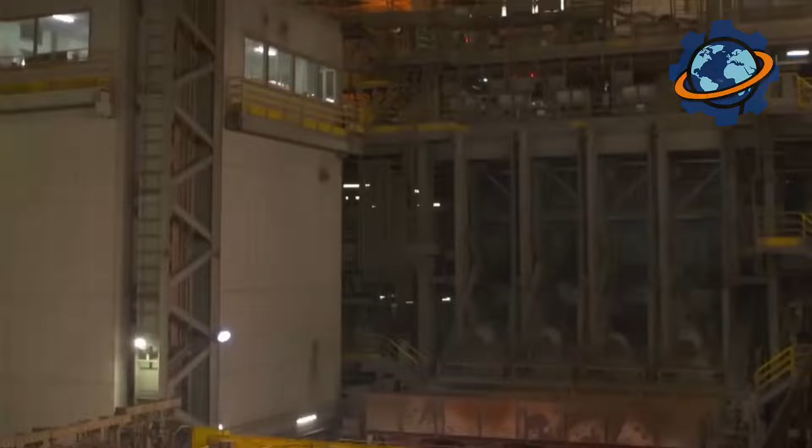First, they tap the slag. It's lighter than the iron, so it floats on top. It's a molten, lava-like mass that flows into special ladles. And then they open the iron tap hole, and a dazzling, sparking stream of molten metal erupts with a roar.

This is the River of Fire. The temperature of this stream is around 2,700 degrees Fahrenheit, 1,500 Celsius. It flows down special troughs, bathing everything around in a blinding light, and fills giant ladles that look like railway tankers. Each of these ladles holds hundreds of tons of liquid metal.

From here, the pig iron will be sent to its next stage, either poured into molds, or, more often, sent for further processing into steel.

A blast furnace is an amazing operation that produces more than just pig iron. The byproducts are just as important. The blast furnace slag, which we've already mentioned, becomes a valuable raw material for making cement, building blocks, and road aggregate after it's cooled and crushed.

The blast furnace gas that comes out of the furnace isn't just released into the atmosphere. It's cleaned of dust and used as fuel to heat the very same air that's blasted back into the furnace. It's a closed-loop system that makes the process more economical.

Without a doubt, metallurgy is a serious challenge for the environment. However, modern technologies are constantly evolving. When blast furnaces are modernized, powerful filters and cleaning systems are installed to capture dust and harmful gases. Scientists and engineers around the world are working on creating green technologies, like using hydrogen instead of coke, to make metal production cleaner. But for now, the blast furnace remains the king of metallurgy.